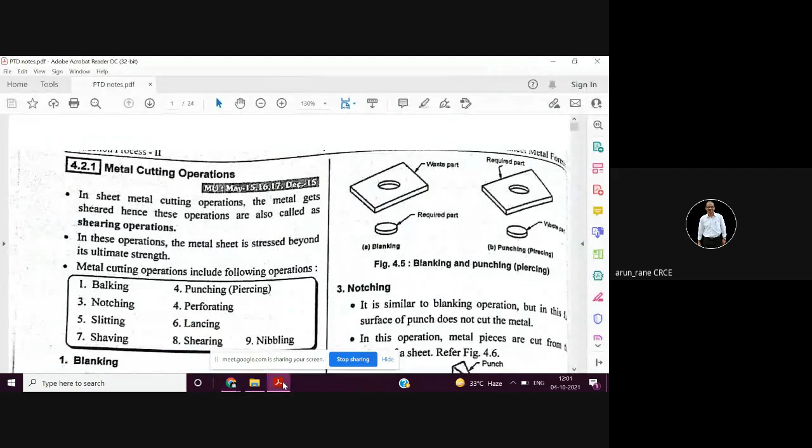So the other day we were discussing the fixed stripper and floating stripper, and the differences between them. I hope you understood that.

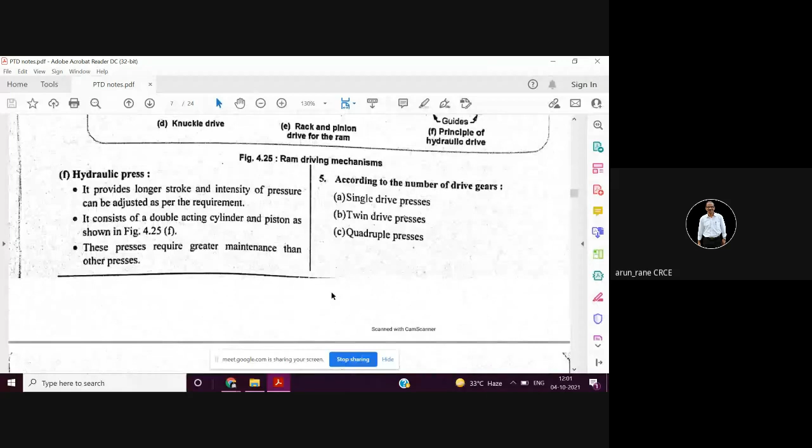Madhav, is the screen visible? Madhvendra? Yes, sir. Yeah.

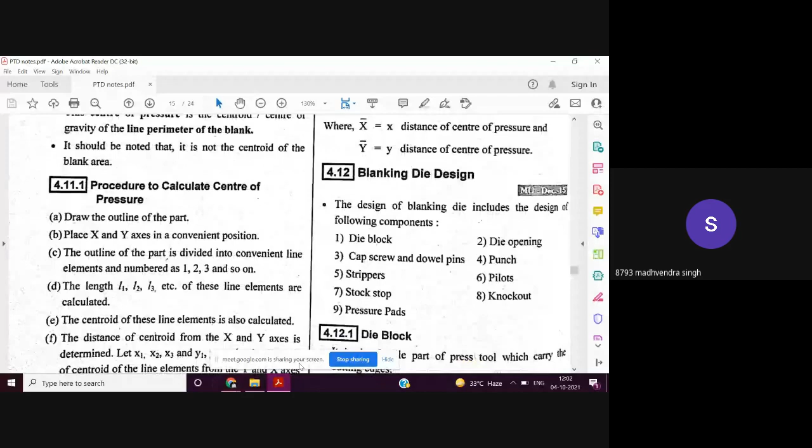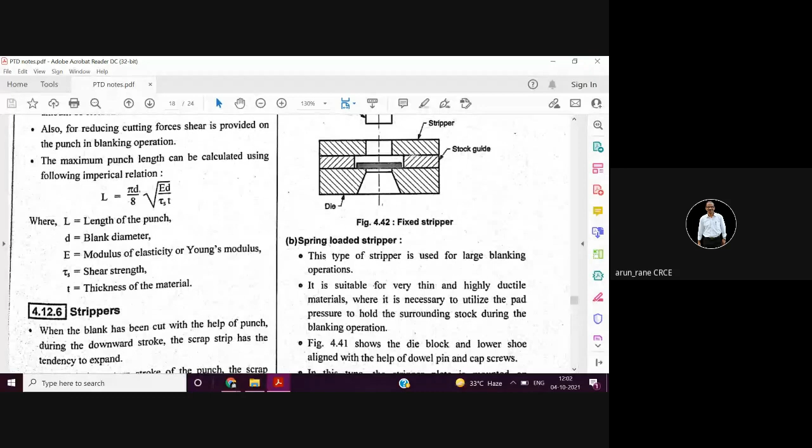So will the fixed stripper have full contact with the workpiece or not? No, the fixed stripper will not have full contact. There will always be some clearance. So this is your fixed stripper, there will be some clearance here, whereas the floating stripper will have complete contact with the workpiece. This is the most important difference.

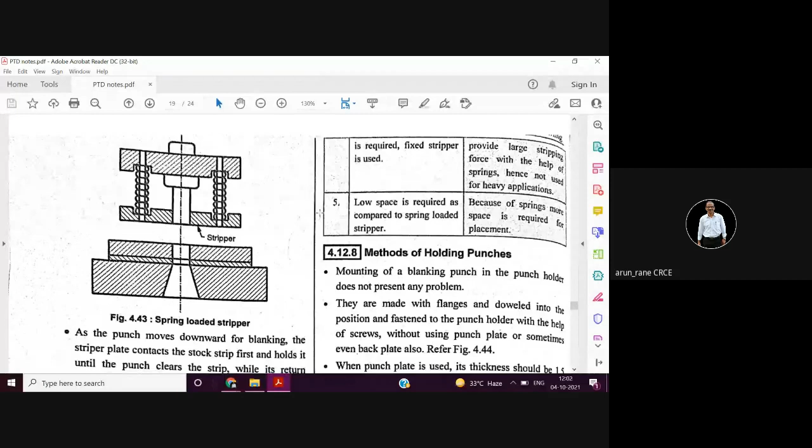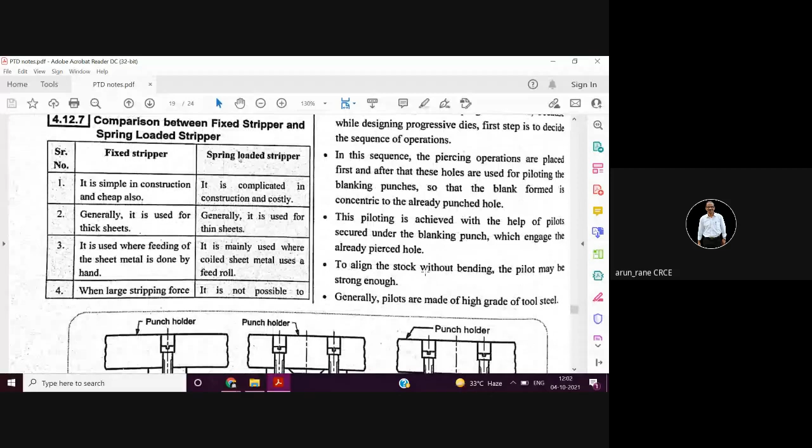Wherever it is asked to differentiate, if it is for 2 marks, then you have to see that you give only 2 points of differentiation. If it is for 5 marks, then you have to give 5 points of differentiation. These are the various ways of mounting the punches.

If the punch is heavy, like this, then it can have a flange through which it can be bolted. As I told the other day, the threading will be only in one part, both parts will not have threading. So here there will be a free hole, and here also there will be a free hole to accommodate the head. You have to see that the head goes down sufficiently, and you need not have so much gap. You can have a gap of 1 mm, that is more than enough.

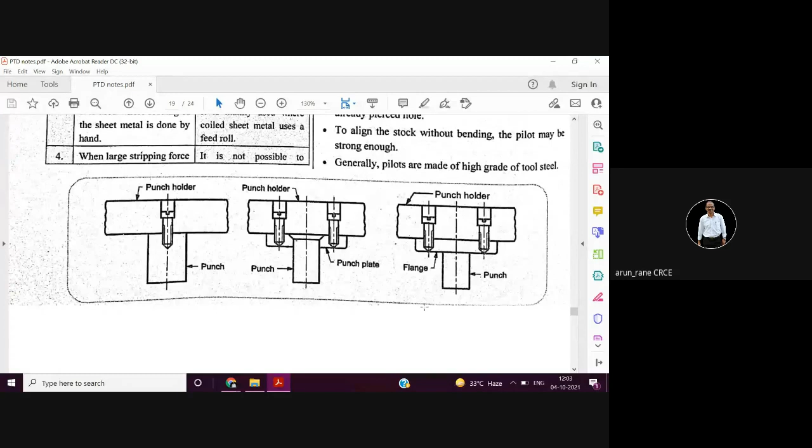Then stock stop, we have already discussed. Stock means strip. So initially, in the morning, whenever you are starting the press, at that time when you are taking the first stroke, you need to stop the strip.

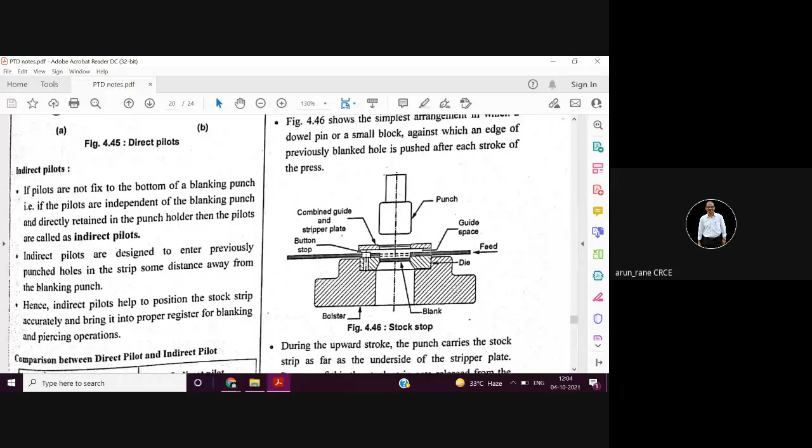That can be done either manually or automatically. Once it is stopped in the beginning, then the subsequent pilots are used to locate the strip. So once we take the first stroke, we have to disengage that manual stop. But it is very important that for the first stroke, you need to arrest the travel of the strip, so for that you need to engage the stop.

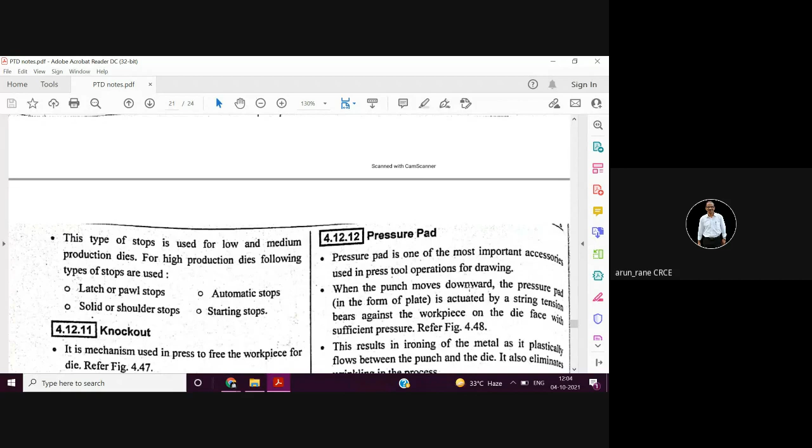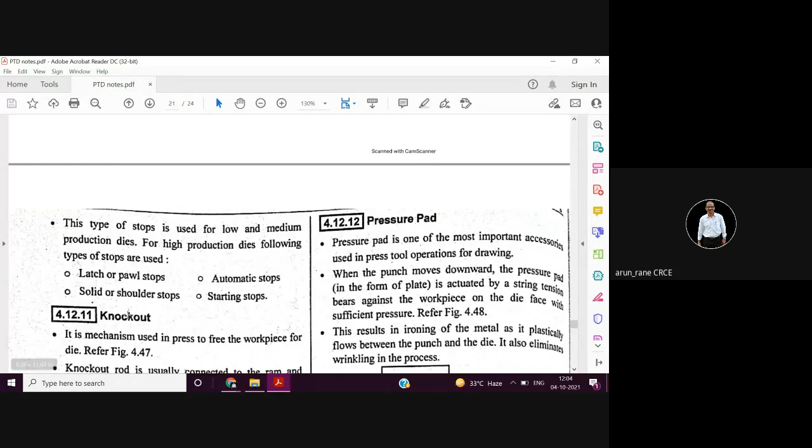This can be done manually or automatically, and there are various types of stops, like latch or pawl stops, then solid or shoulder stop, then starting stops and automatic stops. Preferably automatic stops are used because there is no manual intervention.

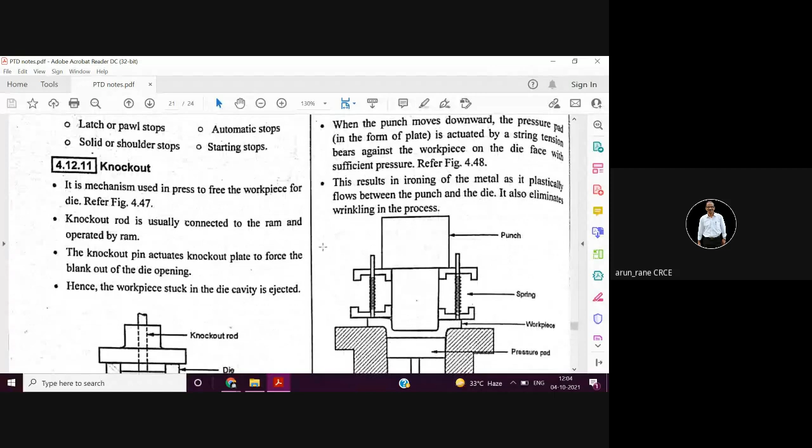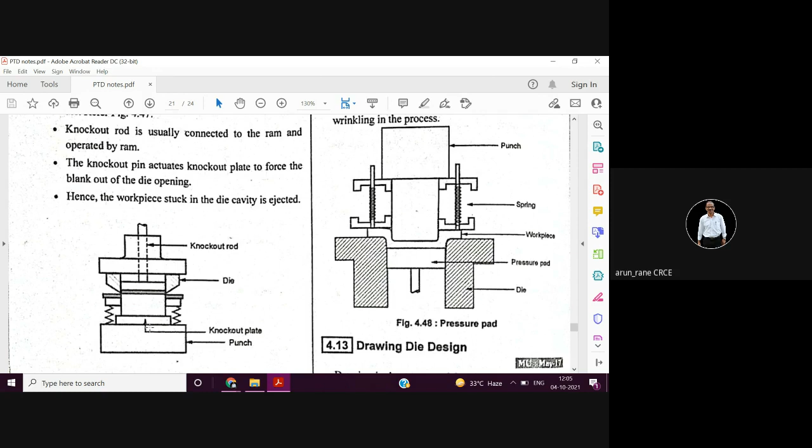Knockouts are used to eject the component. Sometimes there is a tendency that the component may remain stuck inside the cavity. Putting a hand in and removing the component is dangerous, it's not safe. In that case, the knockout plate is actuated either from the bottom or from the top. So in this case, the knockout rod is given from the top, which is used to knock down the slug.

Now coming to the drawing operation. You know that the basic difference is you have to use a hydraulic press, you cannot use a mechanical press. The second difference is the clearance between the die and the punch is equal to or little more than the strip thickness, so that the strip can pass through the punch and the cavity.

If the difference is less, then it will not do the drawing operation, but it will do the cutting operation.

Now, before you do the drawing, you need to have a blank, isn't it? Imagine a cup of diameter 50 and height 100 mm. It is made out of a round piece, and that round piece is called the blank. Now what should be the size of the blank?

There is a mathematical model for that, on how to calculate the blank diameter. So always remember, whenever you are doing a drawing operation, you need to have the blank done. Blanking will always be the first operation or the initial operation for any drawing operation, and the calculation of this blank size is called the blank development.

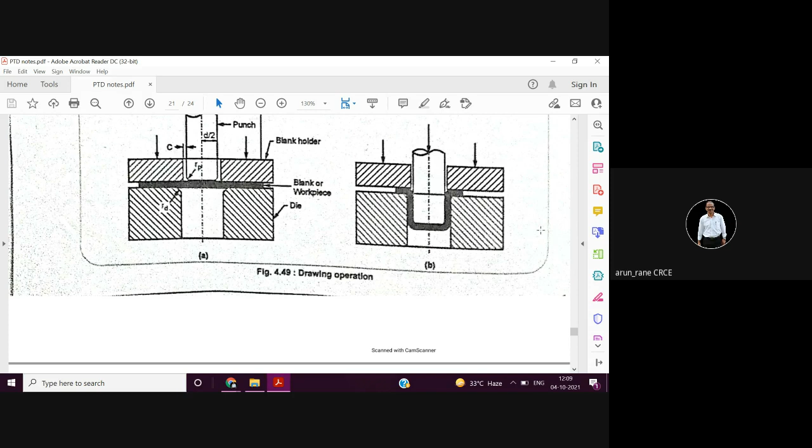So obviously you need to hold the blank properly and evenly so that it can descend down inside the gap evenly. For that we use pads, called pressure pads. In the drawing, this blank holder is nothing but the pressure pad.

So the purpose of the pressure pad is to hold the blank. Now it is slightly tricky. The pressure applied by the blank holder should be just enough that it holds the blank, but at the same time allows it to go down. You should not hold it too tightly, or the drawing punch will not go down. At the same time, you should not hold it too lightly, or the blank will run here and there.

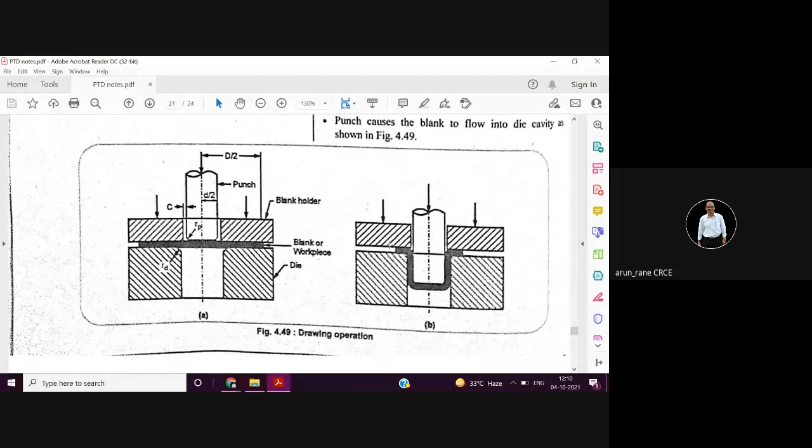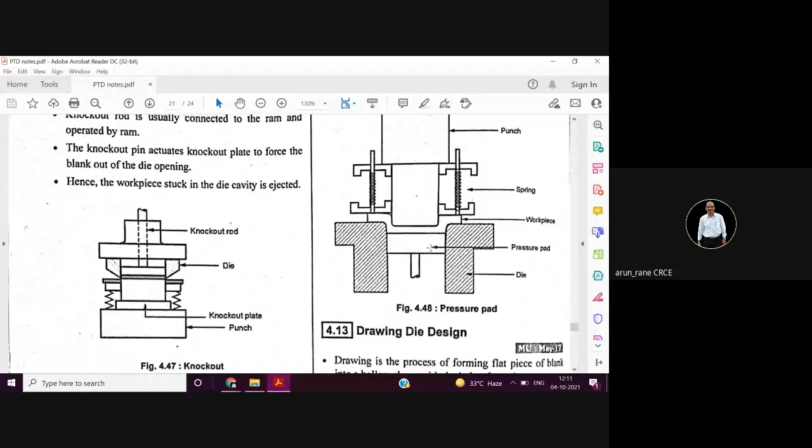So for this, a pressure pad is required. Now a pressure pad can also be provided from the bottom, in order to get a smooth, flat, horizontal surface while you do the drawing. So pressure pads can be on both sides: from the bottom, to support the bottom of the cup, as well as from the top, as a blank holder, to hold the blank so it doesn't run here and there.

Now how to calculate the blank size? You already know how to calculate the blank size for bending. In case of drawing, the blank diameter is given by this formula: capital D is equal to the square root of d squared plus 4dh.

Where capital D is the blank diameter, and small d is the cup diameter. Now you have to remember the cup diameter is the outside diameter. And h is the height of the cup, the finished shell, which is nothing but a cup.

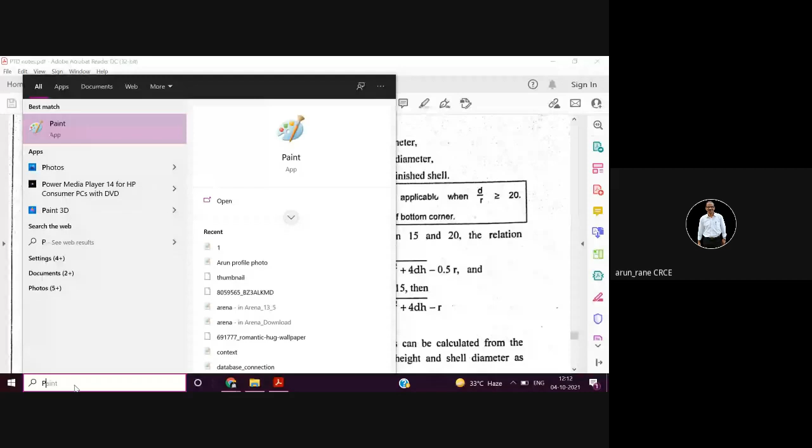I will draw these dimensions in paint. Let me make it thick. So this is a cup, and of course it will have some thickness. Any cup will have a corner radius. This is your corner radius, that is r.

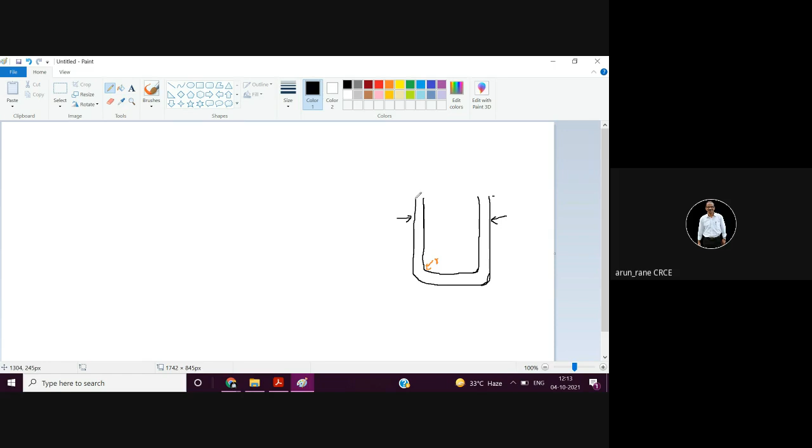Now what do you mean by cup diameter? Cup diameter is nothing but this outside measurement, not the inside one. This is what your cup diameter is. So small d is not the inside one - most students make this mistake while doing numericals. So this is what small d is.

And what about height? Height is nothing but this. Remember, many times to confuse you, they give the inside height, but h is from here to the bottom, not from here to here.

So suppose if the thickness is given as 1 mm, and if this inside diameter is 48, then what will be the value of d? Can anybody tell me what will be the value of d if this is 48?

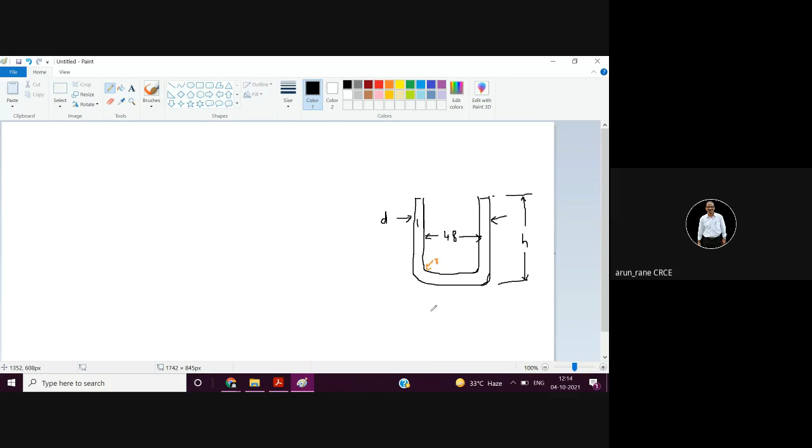Anybody? Hello? Mr. Madhavendra? Hasnan? Umang, can you tell me? Ashish? If this size is 48... Sir, 50. So it will be 50.

And suppose if this inside height is 59, then what will be the value of h? What will be the value, sir? 60. Huh? 60. And remember, for r, you have to take the corner radius.

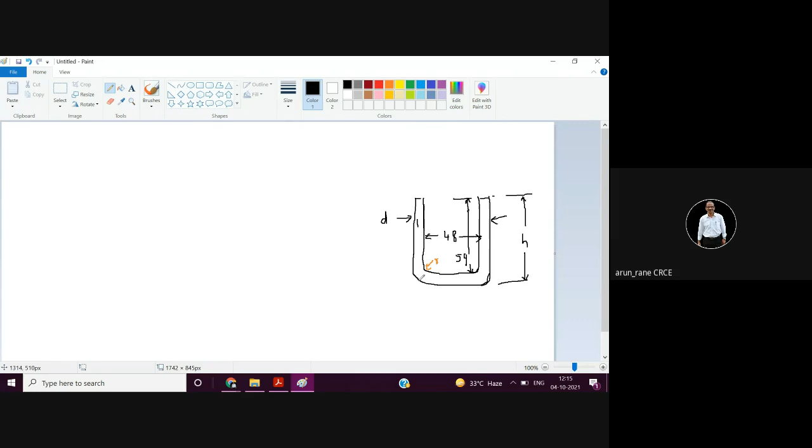Suppose if this outside r is 5, what will be the value of small r? You have to just subtract the thickness, that is 1 mm. So if outside radius is 5 mm, what will be this value of r, this corner radius? Sir, 4. 4. So while doing numericals, you have to take care of these points.

So this d is nothing but the finished diameter, that is outside. Then h is nothing but the height, and this r is the radius of the bottom corner, but the inside one. Now there are three formulas. If the D by R ratio is greater than or equal to 20, then you have to use this formula.

If D by R is between 15 and 20, where 20 is not included, meaning it is less than 20 and greater than or equal to 15, then you use this formula. If D by R is between 10 and 15, you use this other formula. So here it is less than 15, here it is 15 and more, and here it is more than 20. This is called deep drawing, because here the ratio of D by R is more than 20. Of course there is nothing like less than 10. Usually D by R will always be between 10 and 15.

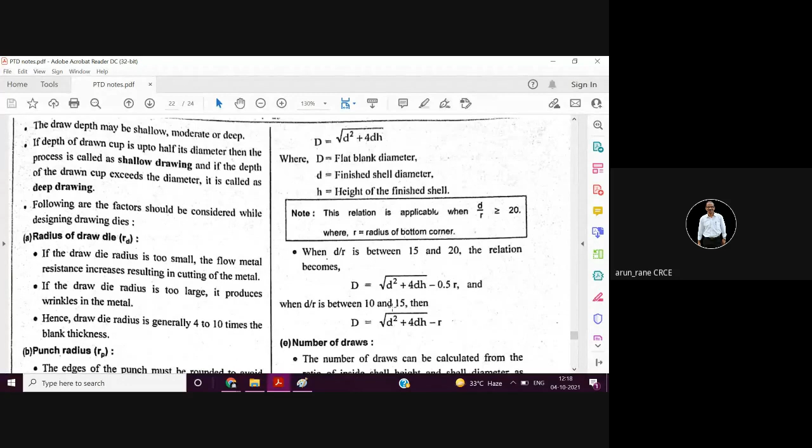Now what about the number of draws - whether you can do it in 1 draw, 2 draws, or 3 draws. If the height to diameter ratio is more, then it cannot be drawn in a single draw. So you have some guidelines here: if the height to diameter ratio is up to 0.7, it can be done in a single draw. If it is between 0.7 to 1.5, then 2 draws. So as the height to diameter ratio goes on increasing, the number of draws will also increase.

There are also limitations to the reduction ratio. Generally in the first draw, the reduction ratio is 45%. In the second draw, the reduction is a further 25%. In the third draw it is 20%, and in the last draw it is 10%. So that's 45 plus 25, that is 70, plus another 20, that is 90, and in the last draw it is 10%.

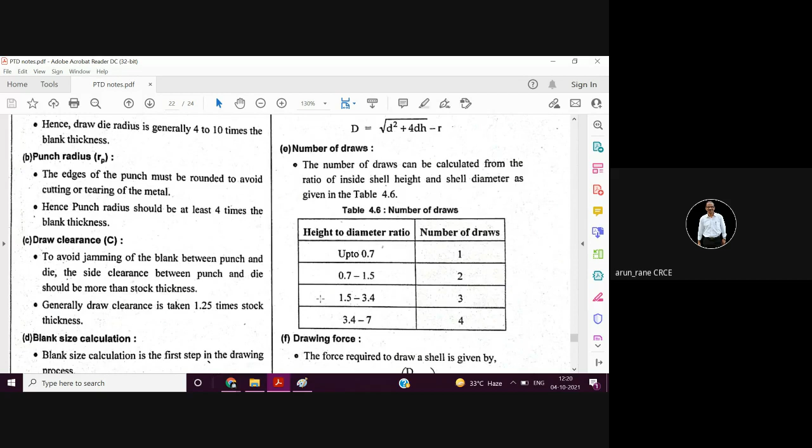Can anybody tell me what is the percentage reduction and what do you mean by percentage reduction? Percentage reduction is nothing but how much you can reduce in one go. So in the first draw, the percentage reduction is 45%. Then in the second draw, it is 25% - so 45 plus 25, please write it down, that is 70%. Then in the third draw, it is 20%, and in the final draw it is 10%.

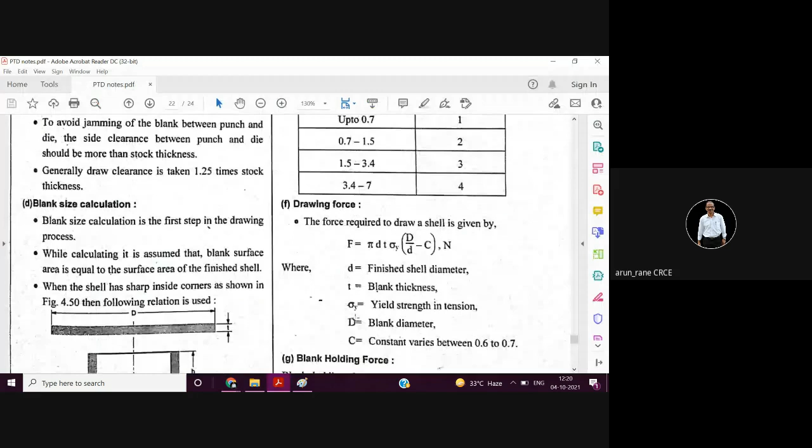You will understand more when you do the numerical. Like we know how to calculate the blanking force, piercing force, or bending force, similarly we need to know how to calculate the drawing force, because you need to select the hydraulic press. The tonnage of the hydraulic press will depend upon the drawing force. So drawing force is given by this relation, this model: F is equal to pi dt sigma y times (D by d minus C). If you are using all dimensions in millimeter, then the force you get will be in Newton.

d is the finished shell diameter, the outside diameter - remember, it's not the inside diameter. t is the strip or blank thickness. Sigma y is the yield strength. Capital D is the blank diameter. C is the constant, and this constant will be provided, and it varies between 0.6 to 0.7.

Now, which force should be more, drawing force or blank holding force? Do you know what is blank holding force? Umang? Vishal? Madhavendra? Which force should be more? Obviously, the drawing force should be more, isn't it?

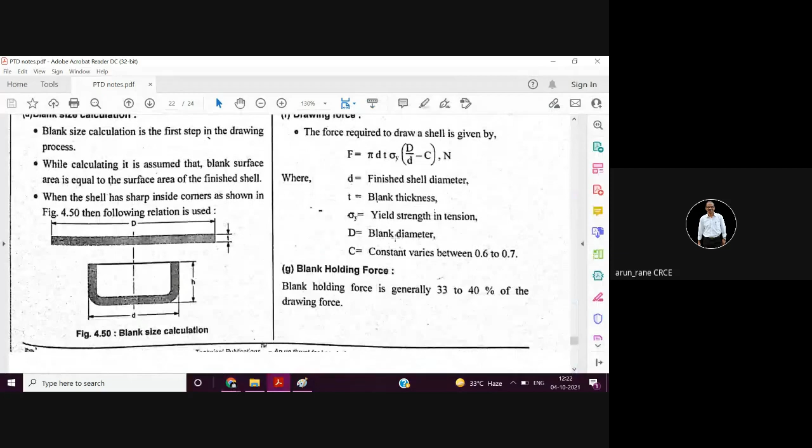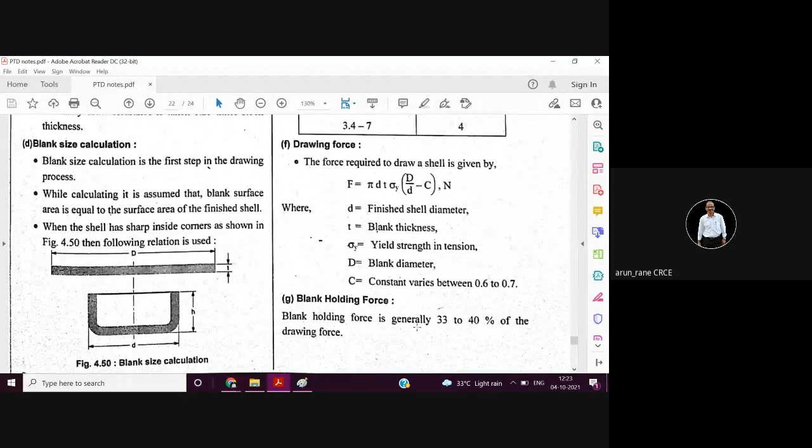So what is the value of blank holding force? Blank holding force is generally 33 to 40% of the drawing force. Like suppose if you have calculated drawing force as 100 Newton, then blank holding force should be around 33 Newton. As I told earlier, the blank holding force should be just nice to hold the blank - we should not hold the blank tightly so that the drawing punch, the punch used for the drawing operation which is descending, will not push the blank down. So blank holding force should be just nice to hold.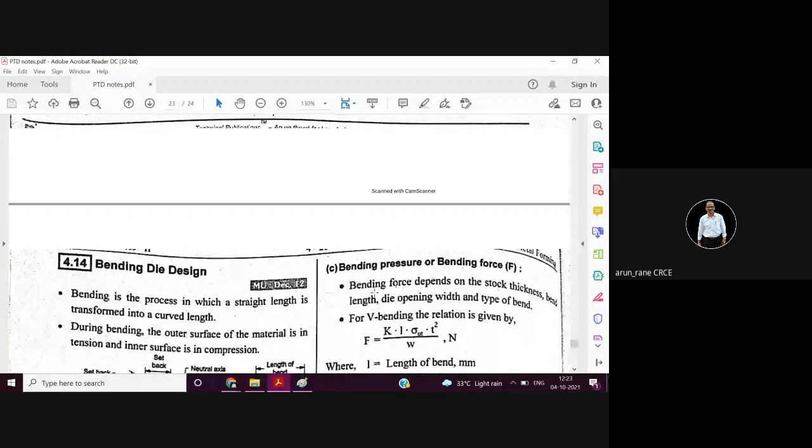We have already done bending die design, how to calculate the blank length. Now this is your bend angle, and there is something you should remember, called the setback. Setback is nothing but this distance. Then this is what is called the bend allowance, and if you see from the side view, this distance is called the length of the bend.

Now, how to calculate the bend allowance? Bend allowance is given by this formula: B equals alpha into R plus K, where R is the inside bend radius.

Remember, inside bend radius is nothing but this. This is what is called the neutral axis, and this is your outside axis. This is your inside axis. So this is your neutral axis.

Neutral axis is the axis along which there is no change in dimension. That's why it is called neutral. Whereas the outside layer will be under tension and the inside layer will be under compression. This is the inside layer which will be under compression, and the outside layer will be under tension.

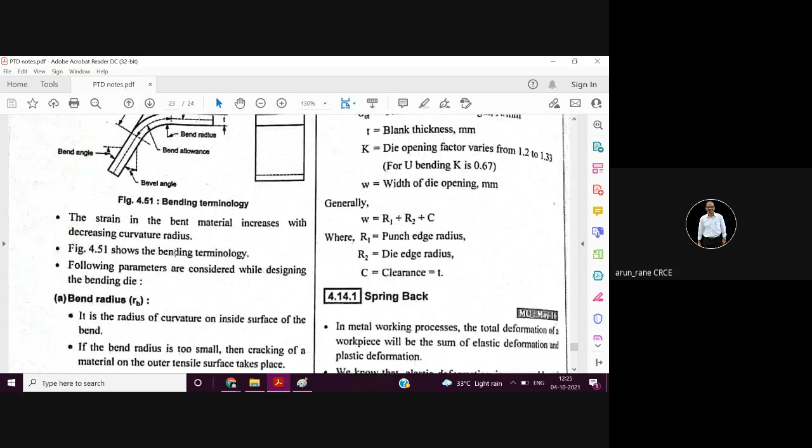So if the outside radius is given, purposely it is given in the numerical, you have to see that you consider the inside radius, inside bend radius. That is what you have to see. And also you have to see that alpha, the angle, has to be given in radians. Angle should be given in radians.

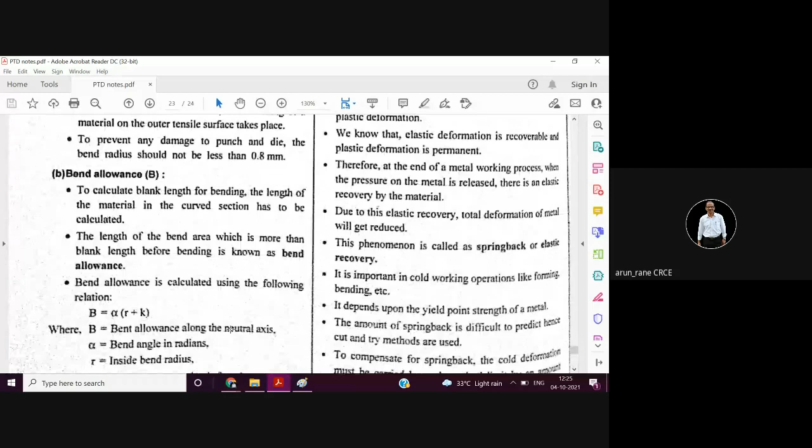K is the distance of the neutral axis from the inside surface of the bend. K is the distance of the neutral axis from the inside surface of the bend. So this is how you can calculate the bend allowance.

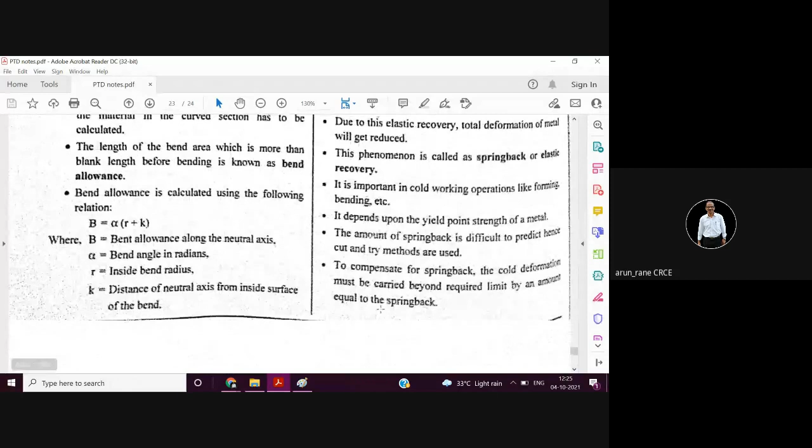Then how to calculate the bending pressure? We'll be doing numericals on this, how to calculate the bending pressure or bending force. So that is given by this. Now again, there are different models for different types of bending.

If it is V bending, you know there are various types of bending, like V bending, channel bending, C bending, edge bending. So for V bending, this is the model: F equals K into L. L is nothing but the length of the bend, and it is quite logical and obvious that if the length of the bend is more, the pressure required will be more.

This is sigma ut, which is nothing but the UTS, ultimate tensile strength. You have to be careful about the units. T is the blank thickness and K is the die opening factor.

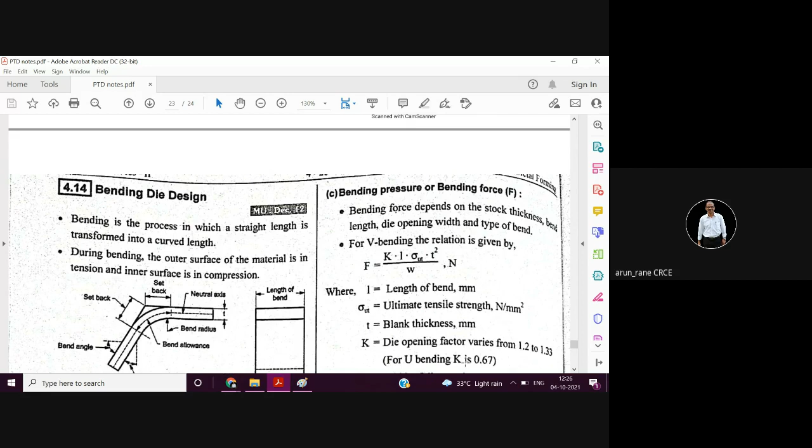Now remember, here in bending force calculation, K is nothing but the die opening factor, whereas in bend allowance, K is nothing but the distance of the neutral axis from the inside radius.

Now, how to calculate this W, which is nothing but the width of the die opening. So W is given by R1 plus R2 plus C, where R1 is the punch edge radius, R2 is the die edge radius, and C is the clearance, and clearance equals the thickness of the strip.

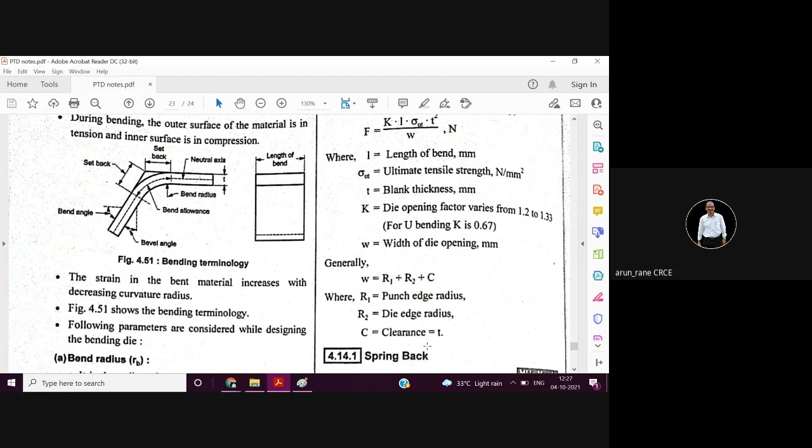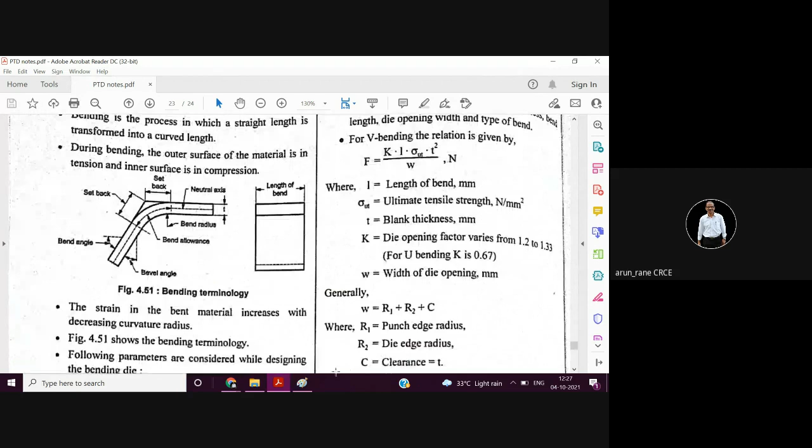And what is punch edge radius and what is die edge radius? That is, whenever you are doing bending for the punch as well as for the die, the radius is given. So I'll draw it for you. This is your die, and this is called the die radius, and this is your punch.

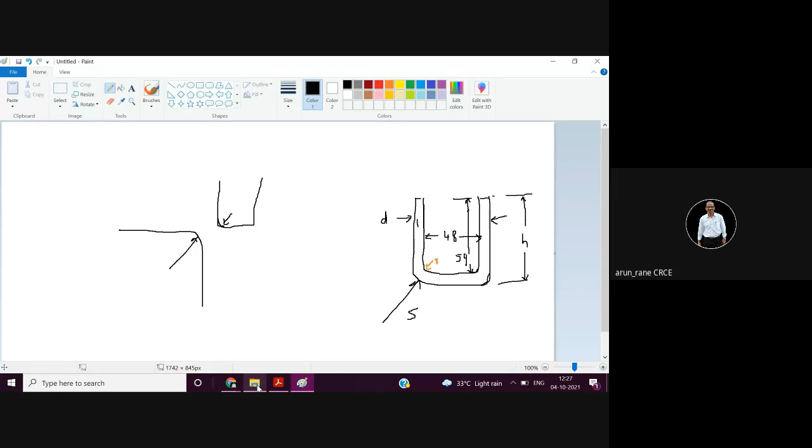So the corner radius of the punch is called the punch radius. Okay, so one is R1 and another is R2. So W is calculated by this: R1 plus R2 plus C.

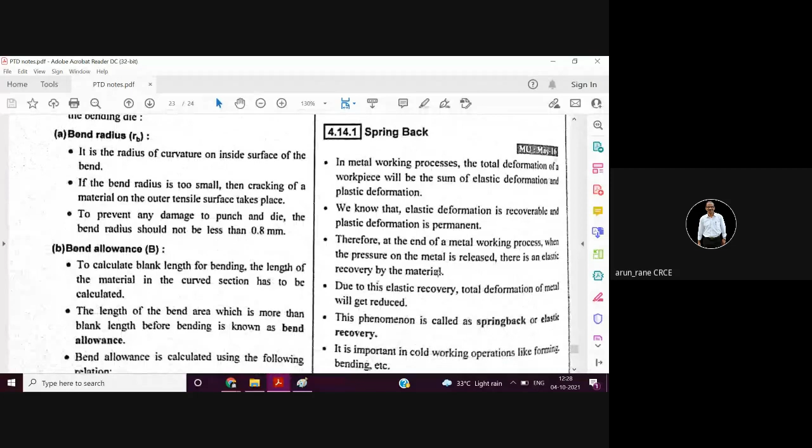Then spring back. What happens during bending? Once the punch goes down and does the bending, it comes back up. So there is a tendency that the material again comes inside.

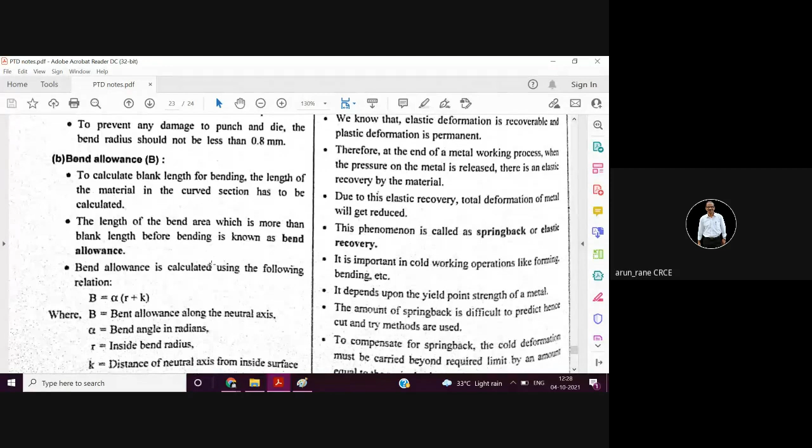Like suppose I want to do a bending of say 60 degrees. So a 60-degree punch has gone down. Now when the punch goes up, there is a tendency that instead of 60 degrees, you get 58 degrees. And that is what is called the spring back.

This is because of the elasticity, and that is what is called the spring back. That is, the material is springing inside.

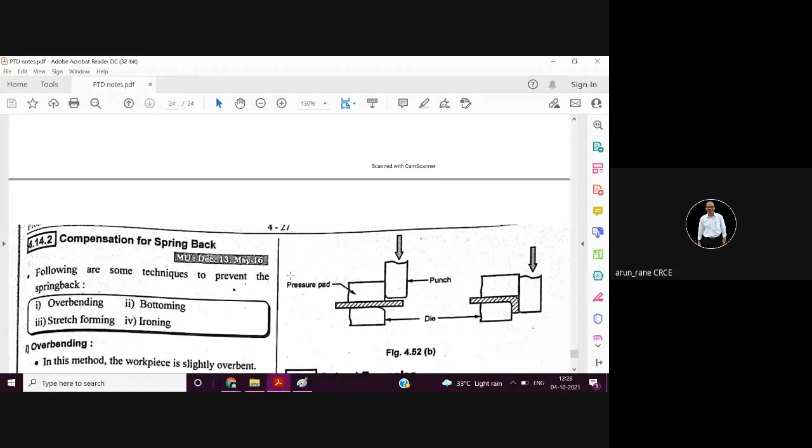So there are different ways to avoid this spring back. One of the ways is, suppose if you want 30 degree included angle, it has been experimented and found how much the spring back is. So suppose if the thickness is 2 mm and if the spring back is 2 degrees...

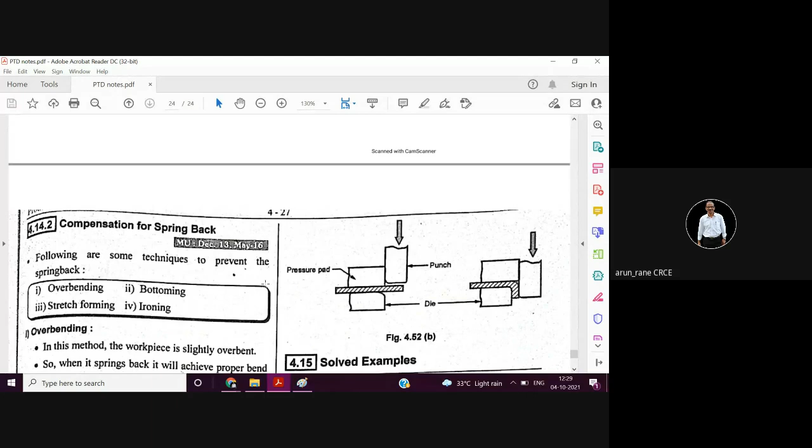Then it is quite logical that you give 32 degrees in the die. So you bend it to 32 degrees. So after spring back of 2 degrees, you will get 30 degrees. That is what is called compensation for the spring back, and that is over bending.